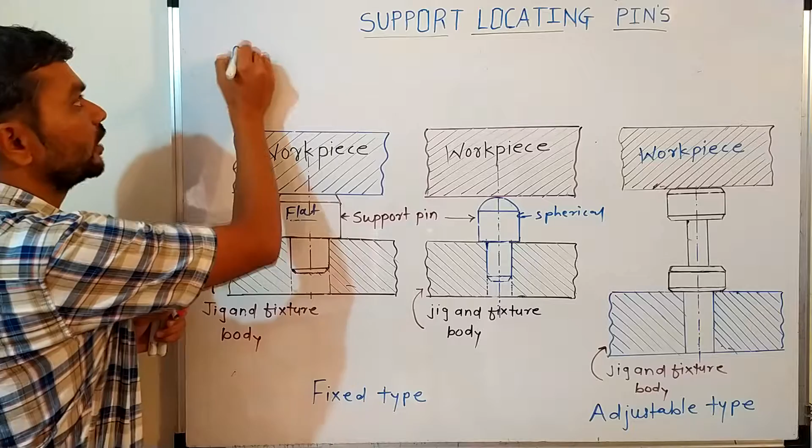Hello friends, here in this video we are going to see about the support locating pins. So basically these support locating pins are also called resting pins, or button, or simply pad.

So what is the basic function of these support pins? These support pins are used in the jig and fixture body to support the workpiece. Here we can see that this workpiece is supported over the locating or support pins in a jig and fixture body in order to get the proper machining operation over it.

So here we have two types of support pins. First one is fixed type and second one is adjustable type. Let us talk first about the fixed type of support pins. Fixed type support pins are divided into two types. First one is flat head support pin and second one is spherical head support pin.

The flat head support pins are used when the workpiece is previously finished or previously machined, or it has a flat surface. Only then can this flat head support pin be used. Here we can see the flat head support pins over which the workpiece is mounted, and the bottom portion of the support pins is mounted inside the jig and fixture body in order to get the proper machining operation over the workpiece.

Here we can see that this flat head support pin has more area of contact between the workpiece and the support pin. So it will give accurate and stable positioning to the workpiece over the jig and fixture body. This is one of the advantages of flat head support pins.

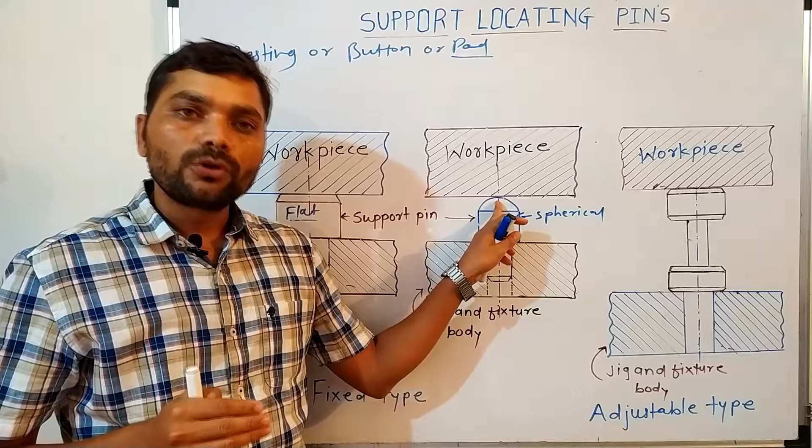Here we can see that there is a point of contact between the workpiece and the spherical head support pin, because we have an irregular workpiece, and this point of contact will ensure proper positioning between the workpiece and the jig and fixture body. So this is about the spherical head support pin.

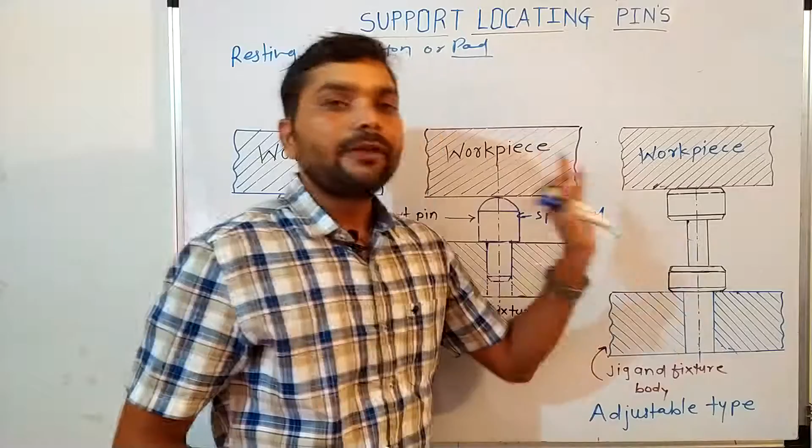Next, another type of locating pin is the adjustable type. It can be used when the dimension of the workpiece can vary. Here we have a diagram of the adjustable type of support pin. Here we can adjust the dimension of the support pin, so that's why this support pin is called adjustable type.

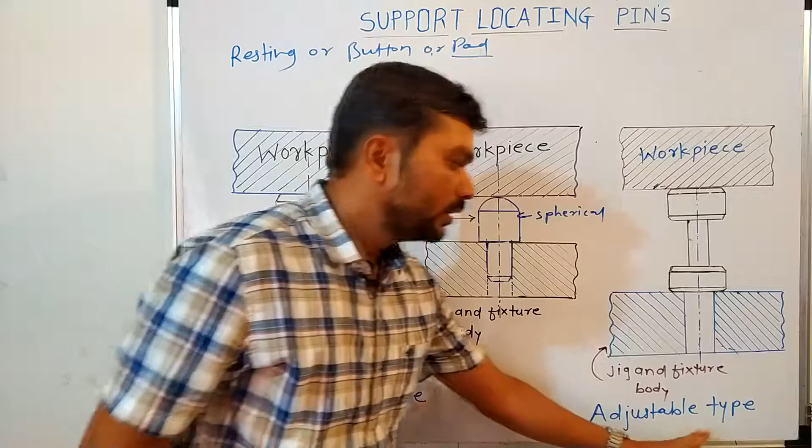Here we have the adjustable support pin over which the workpiece is mounted, and over the jig and fixture body there is a support pin. So this is about the adjustable type of support pin. So here we have basically three diagrams of support locating pins.

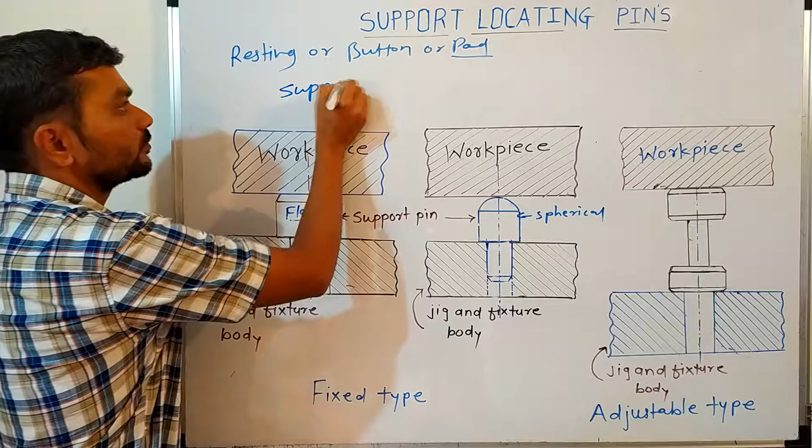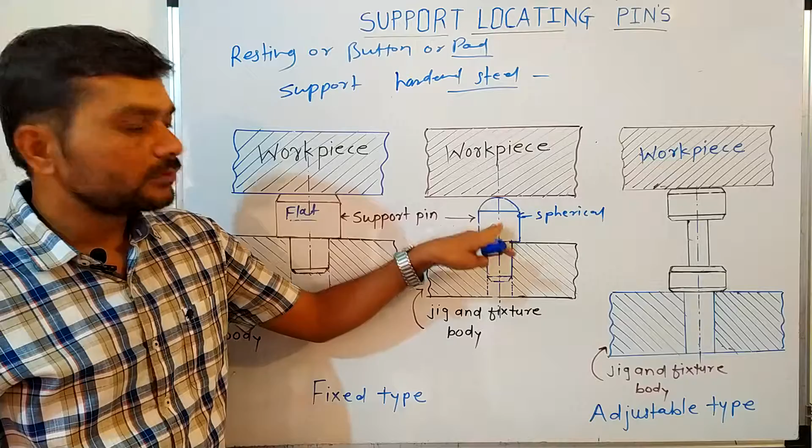Basically these support pins are made of hardened steel, and they are previously surface finished, so that the workpiece can be loaded and unloaded over them. So this is about the support locating pins.